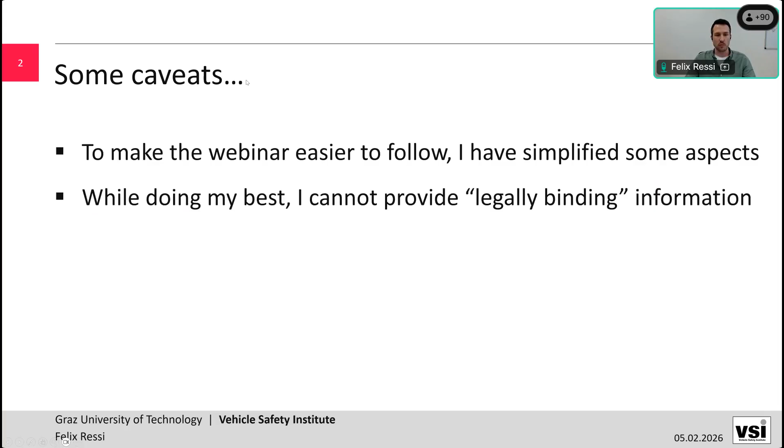I have made some simplifications just to make it easier to follow, so if there is something which is not exactly accurate in the sense of, well, there's one step you missed, Felix - some simplifications are, I think, a good idea to make it easier to follow. Also, while I'm doing my best, I cannot really provide legally binding information here, so keep that in mind. And most importantly, all the information in this webinar is valid as of today, at least. The next Euro NCAP protocol update will be implemented in 2029, and aspects in technical bulletins may even change before that. So keep that in mind and always make sure you rely on the latest relevant documents.

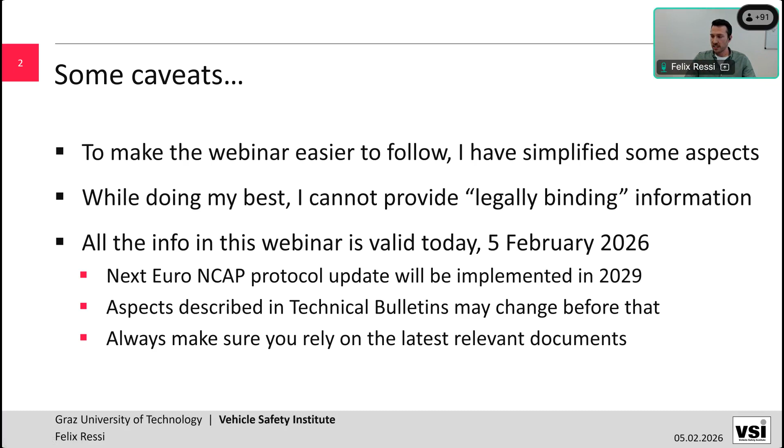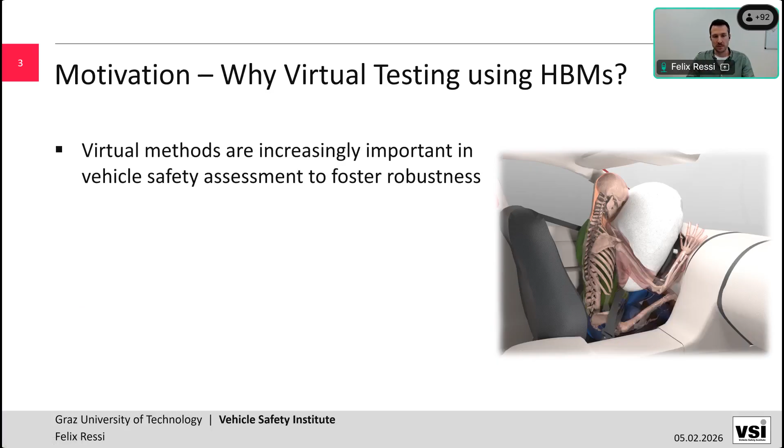With that being said, I'd like to start and say, well, why are we doing all of this? What's the motivation behind using HBMs in virtual testing? Well, first, virtual methods in general are increasingly important, not only in development, but also in vehicle safety assessment. And Euro NCAP has been a pioneer to some extent in this. One of the main goals here is to foster robustness. And human body models in particular enable us to overcome many limitations of current dummies or ATDs.

One of them is that they enable enhanced injury assessment, for instance rib fracture risk predictions, down to a tissue level. This can also be used to consider effects like aging. And very importantly, we can consider anthropometries where no ATDs, no hardware, exists. This is really a key benefit offered by human body models. Also, these models enable us to look into lower severity but higher exposure crashes, which recent research has shown to be really relevant in the overall accidentology.

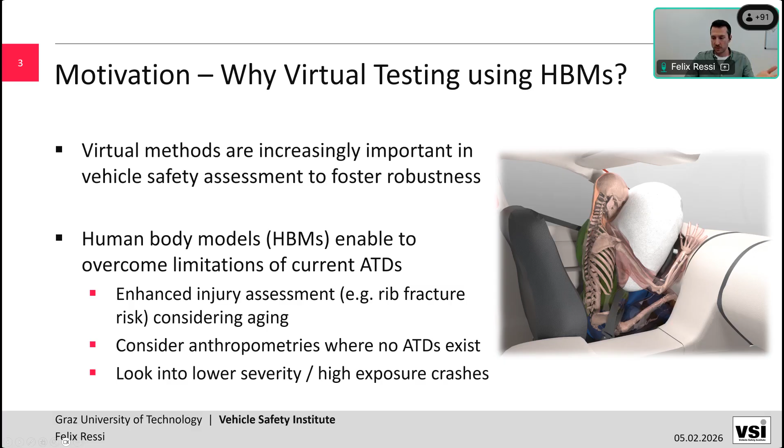So we say that's a really important step, including HBMs, but as always, there are major challenges involved with new developments. I have brought four major challenges for HBM implementation, and this is also providing some structure to this webinar.

The first thing is we need to make sure that the models are good enough—this is what we call the qualification of human body models for virtual testing. The issue here is that we have no direct, well-defined physical counterpart. Like when you think of a dummy, you have the physical measurement device.

That doesn't exist for human body models. While actual humans exist, every human is a bit different. That leads to the fact that if you do PMHS testing—post-mortem human subject testing—you have inherent biological variability there. So there's always going to be differences, and that's just the nature of the tool.

A second part is that we really need to make sure we have harmonized usage of these models in virtual testing. So the question is, how can we use these models in a comparable way? And further, harmonized interpretation of results is a key challenge—for instance, knowing which outputs to use and how to use them in particular.

Finally, we need to make sure that the simulation results have integrity. We need to ensure that they were generated with qualified models, that the results were not tampered with, and that we can trust these results.

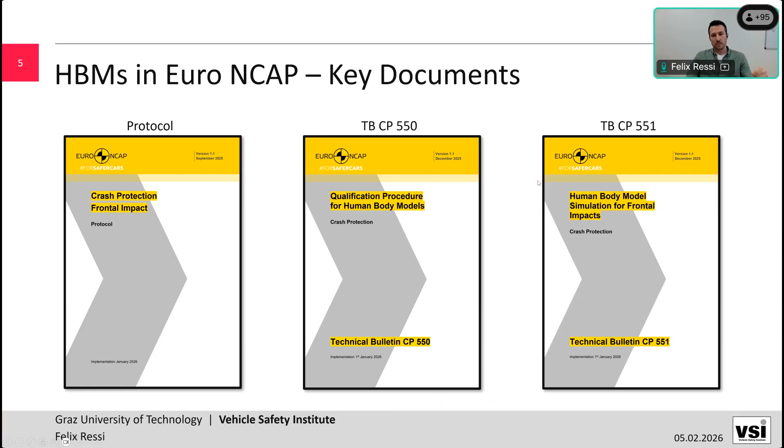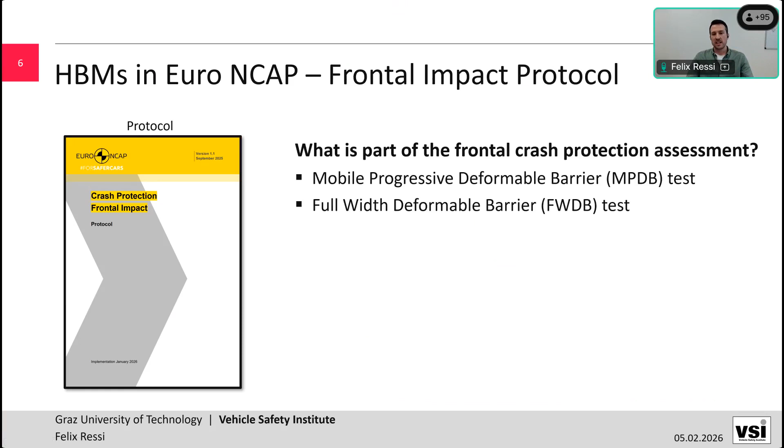Briefly, what do these deal with? The protocol essentially answers the question: what is part of the frontal crash protection assessment? It details the MPDB test, how to do full width deformable barrier testing, and then SLED and virtual testing.

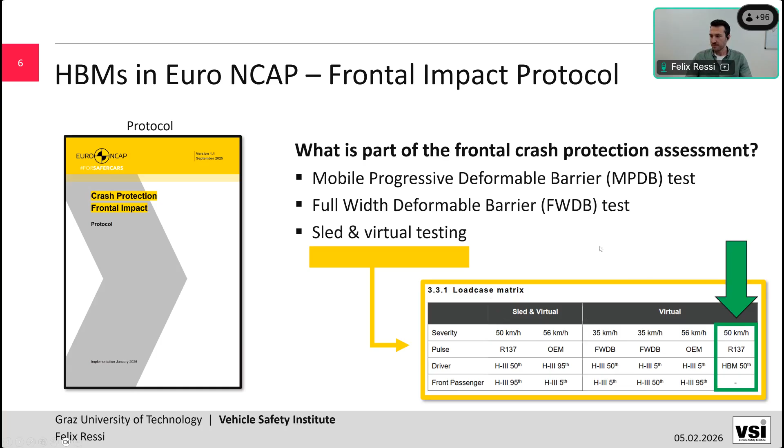So onwards to the Technical Bulletin CP550. This answers the question: when can you use an HBM for virtual testing? What does it need to do? It describes the qualification procedure and all the qualification requirements—from geometry to quality, detailing the outputs—and also the scores you need to achieve if you run the validation load cases.

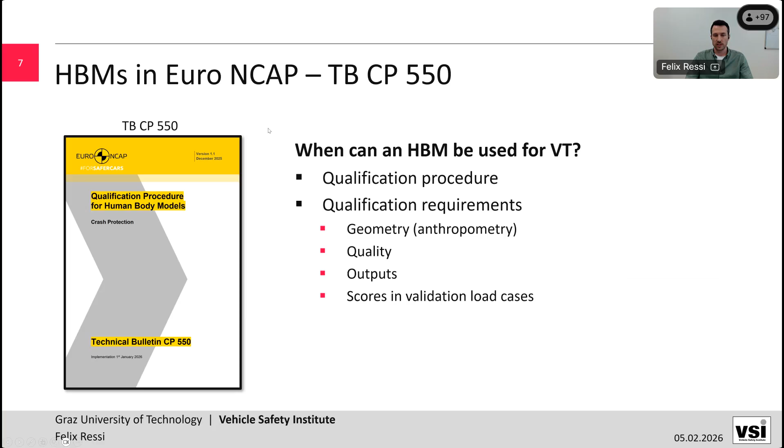I will touch on that more over the course of this webinar. The third document essentially answers: what do the HBM simulations need to look like, and what data do we need to provide to Euro NCAP? How to set up the load case in terms of seat position, HBM position, etc., and what quality criteria we need to fulfill to make these eligible for Euro NCAP.

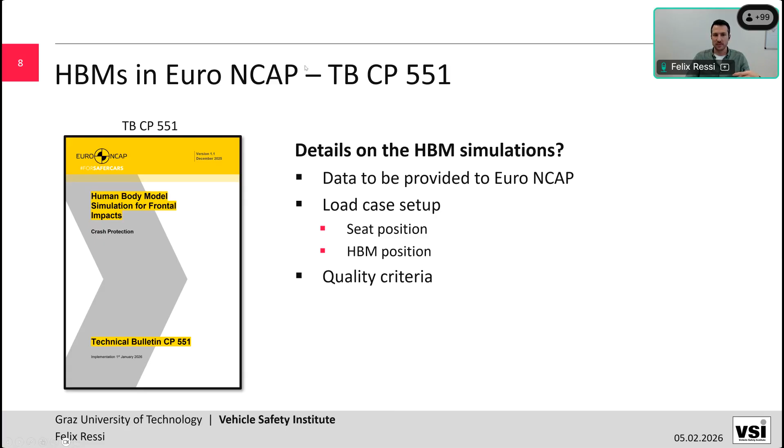So these are the documents essentially. Now I want to jump to the process to highlight how this ties in with existing virtual testing. Of course, virtual testing as such is not new for Euro NCAP—this has been around for dummies, specifically for the WorldSID dummy. This, for instance, is another technical bulletin, CP520, dealing with the WorldSID qualification.

Another document is available for the Hybrid III simulations. So this is also something which is already in place now. Just to recap how this works: you have a qualified dummy model, which is checked, of course, by Euro NCAP.

You do your CAE simulations, a set of virtual testing simulations, some of them validation simulations. For the virtual testing, you have checks on data quality, consistency, completeness, and several quality criteria. If you pass this, you can then move on to do your laboratory testing, where your validation simulations are checked against the validation SLED results from the physical tests.

That's your validation check in terms of ISO score, as well as assessment criteria. All of this is then combined in the assessment and scoring part, and you get points for virtual testing as well as your SLED results. So if we add human body models on top of that, the key part is that we also need a qualification part for the human body models—and as I just mentioned, this is CP550 in essence.

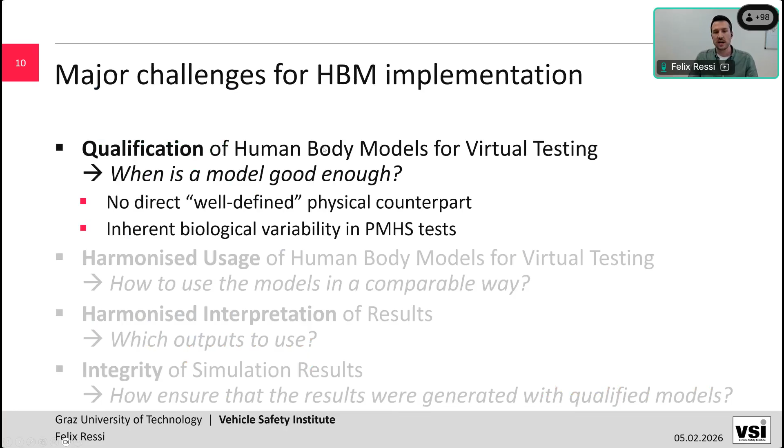So let's try to tackle the major challenges. I started with the qualification part. How is this now set up for Euro NCAP? Well, some people will maybe remember some of these slides from an IRCOBI presentation, and this is because the IRCOBI paper we made deals exactly with this procedure. But bear with me, there's some new slides as always.

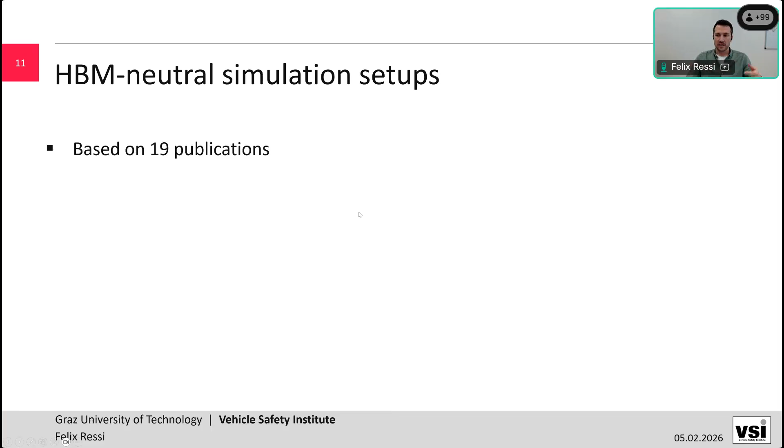So these HBM neutral simulation setups are based on 19 publications, and as we have heard in the introduction, they are HBM agnostic. The user just needs to bring their human body model, and then there's a step-by-step guide to set up the simulations. This was maybe what I had in mind when I originally started this work - you just put your model in, you get a HBM neutral simulation setup combined with that, and then you have a ready-to-run LS-DYNA deck. It's almost like that, not quite, but we're close.

And some important facts about these simulations: the HBM positioning, for instance, is mostly done within the simulation. Only the initial orientation is modified by parameters the user has to set initially, but the rest of the positioning is part of the simulation. The reason behind that is that the goal was to have a high degree of reproducibility, as well as allow for future integration of hashing, so traceability, which I will touch on later. So we want to make sure the HBM remains unchanged in each step, and no user interference, so to say, happens which is not controlled.

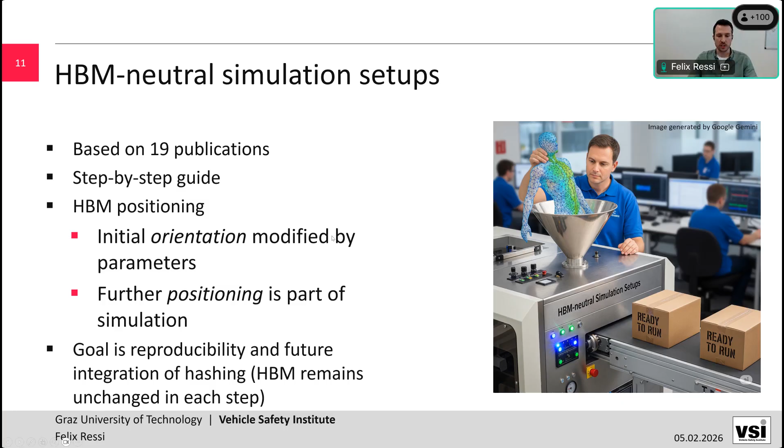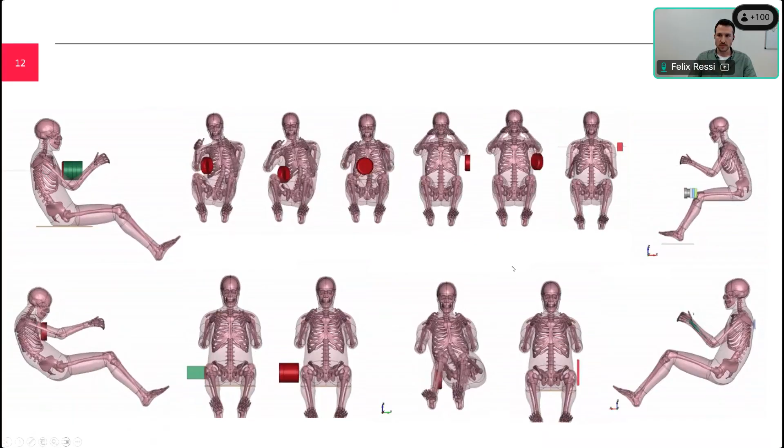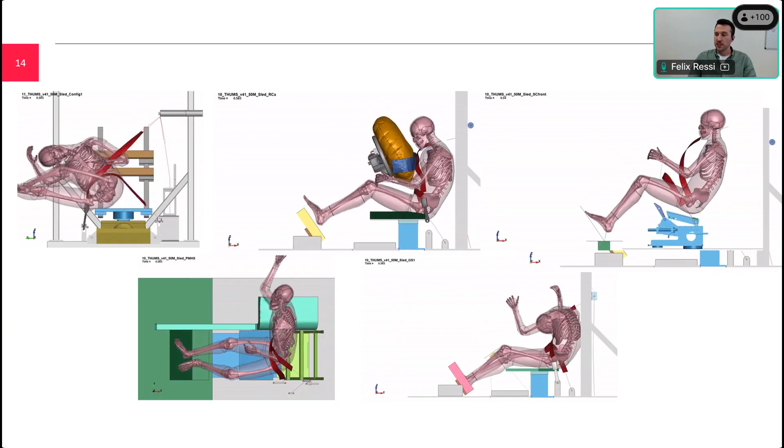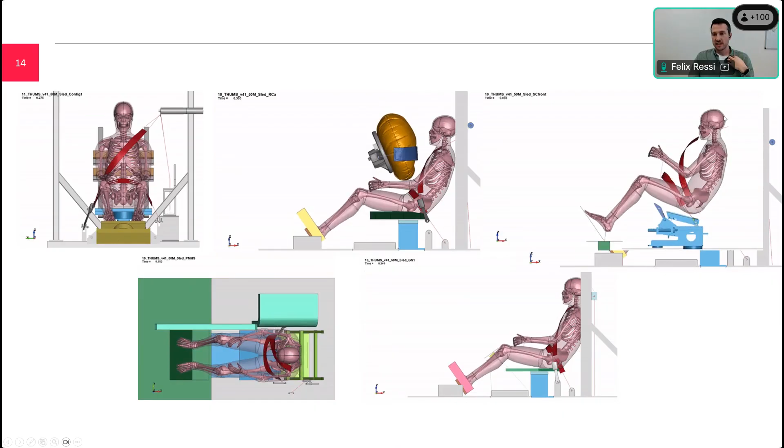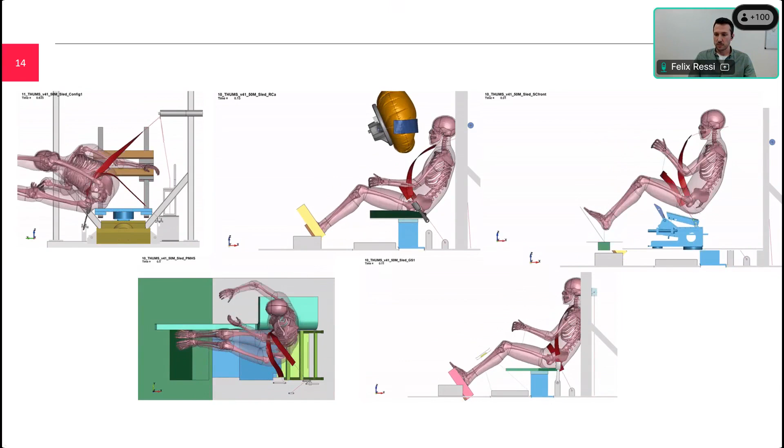But what do we do with these simulations? So we extract relevant information on kinematics, for instance, and then have derived corridors from the PMHS data and compare these with our HBM response. And for this, we have developed a specific scoring methodology. Before I touch on how the scoring works, I need to do some explaining of some basics, how this works.

So the basis for our methodology is a library or a method called ARCGen. And actually, this was developed by Devon Hartlen and Duane Cronin. The pictures I show here are from their publication, and actually Devon gave a great OVTO webinar on this topic. So if you are interested, we will also share the link to that here. But to explain the principle here, this will be a very short explanation.

If you imagine you have curves in the XY space, you can, for each curve, calculate their arc length, just following the curve along. And if you use this and then normalize the curves over their arc length and plot them as X over normalized arc length and Y over normalized arc length, this is what's shown here. This gives you a great option - you do feature alignment, so you can do some warping and make sure you align relevant features. And then with the aligned signals, you can do statistics and compute means for each point over warped arc length, and standard deviations for each point. And if you then recombine the X over warped arc length and Y over warped arc length back together, you get this XY plot where you can actually have ellipses for each point showing 2D confidence intervals.

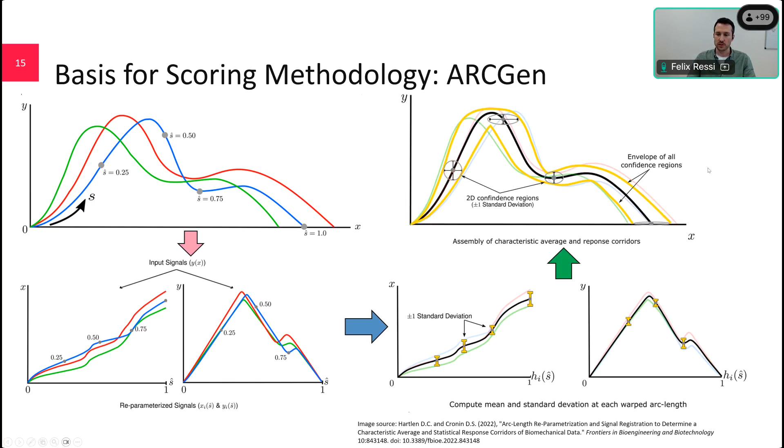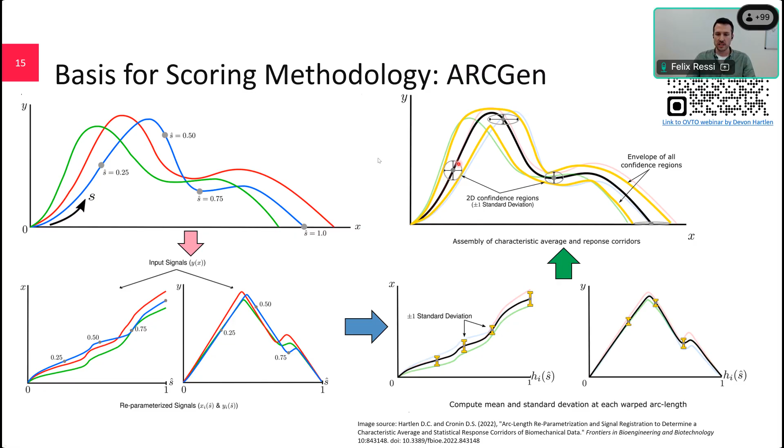As I said, there is a great webinar by Devon on the details of how this works, but I want to touch more on how we use it. And if you look at these ellipses, this is what we use for the scoring here.

So this is an example. The plot on the left shows a time displacement diagram, and in this case, it's for a sled test, the gold standard 2 test, where we look at head X displacement.

And you will see here I plotted a green ellipse and a red ellipse. Well, what are they based on? The black dashed lines are the PMHS responses. The lime green line here in the middle is the characteristic average, calculated using ARCGen.

And the darker green lines are the envelope of the 1 standard deviation ellipse, and the red lines show the envelope of the 2 standard deviation ellipses.

And our scoring works in the following way. So if your blue HBM response—sorry, I forgot to mention this—here now I have one simulation response in there, which is from an exemplary HBM simulation.

If this response at each point is within the green ellipse for the respective corresponding point of the characteristic average, you get a score of 1. If you are outside of the 2 standard deviations ellipse, you get a score of 0.

And for any point in between the 2 ellipses, we do a linear interpolation to get your score, so that's between 1 and 0.

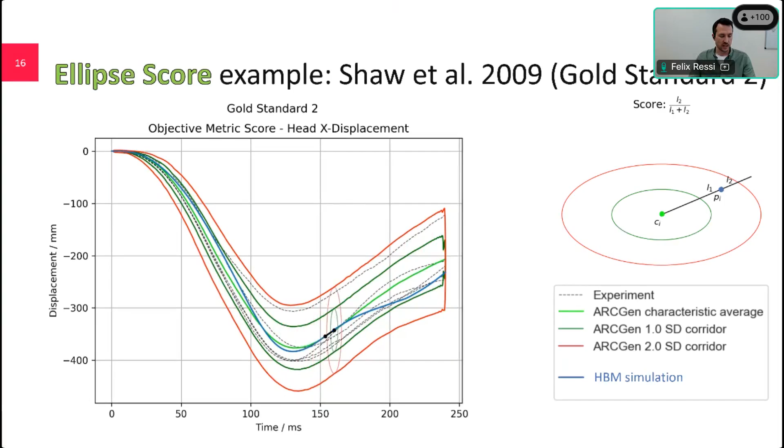So we added a second score, which we call the dynamic arc length warping score, or DALW. And this uses the same principle as ISO scoring, where you have a dynamic time warping.

In simple terms, you have a window where you don't have the fixed mapping between each point of the ARCGen characteristic average and the simulation curve, but you have some margin where the algorithm tries to connect the best dots to get the lowest score.

And if I play this animation, you will see that this aims to be within the green ellipse as much as possible. Of course, if the deviation is beyond, in our case, 10% based on arc length, then it will not be able to keep it in the green ellipse.

But in this example, the corresponding DALW score is 0.97, so a lot higher and almost a perfect score, which would be 1, of course. So these are the two scores we developed for this.

Why did we stick with 2? We found in our testing that this DALW score can be very lenient, so to say, and you still have quite different looking signals that still score relatively high.

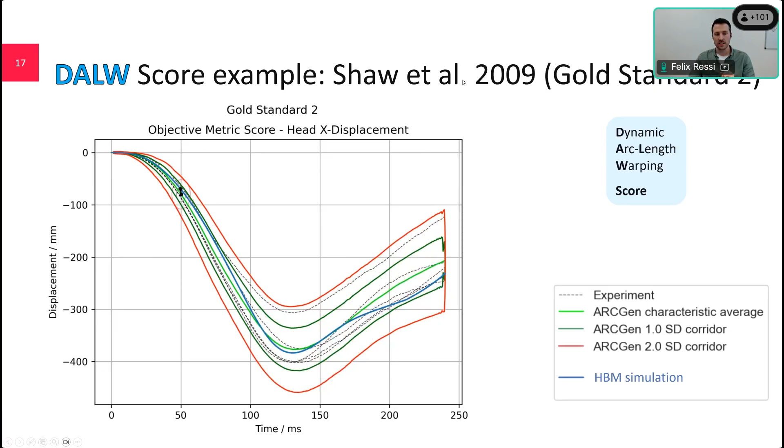And by putting 2 scores into the requirements and the technical bulletins, we hope to remedy this effect for the monitoring phase. But this is not set in stone, in the sense that we are really keen to improve this methodology. But this is what's now implemented in the current technical bulletin.

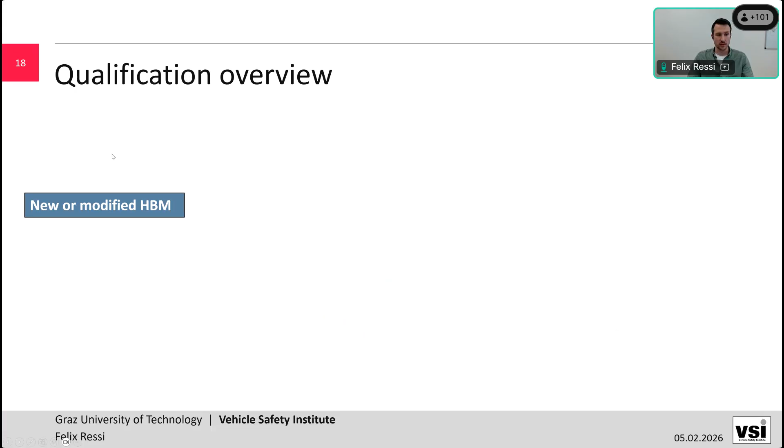So with this, I can give you an overview of how the qualification works. If you now have a new or a modified HBM and you would like to get a certificate to say that this is now a qualified HBM you want to use in virtual testing, you need to do a full qualification if this has not been qualified previously.

That incorporates the geometry, the quality criteria outputs the model has to have, and you need to run all the validation load cases. Based on the results, there is a check, and if you fulfill the requirements, this HBM can be used in virtual testing. If the HBM does not fulfill the requirements, it cannot be used.

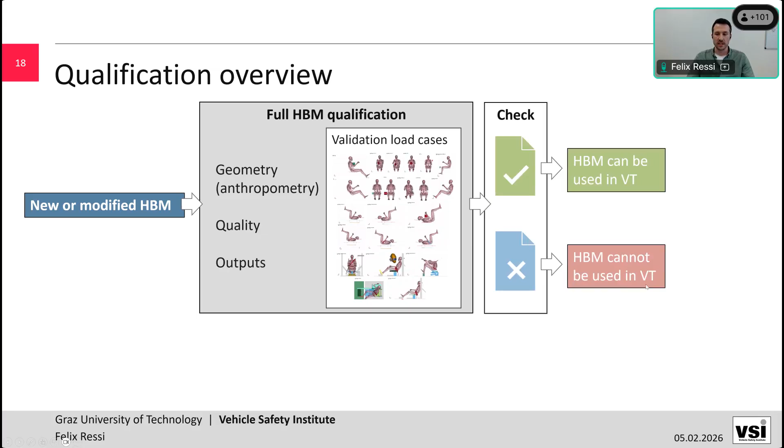But more often than not, people will use existing human body models that have already been qualified. Here, the user just needs to run two simulations. The reason is we want to see that the human body model, when used by the specific vehicle manufacturer or supplier, behaves very similar to what was submitted in the full qualification. The requirement is that you are within 0.1 plus minus points of the score, making sure you get very similar scores as when the model was originally submitted.

If you pass this check, the simulation results are eligible for full points. If it doesn't pass, that's still not the end of the world, because you could still go for a full qualification. If you pass all the thresholds and requirements, you can still use it for virtual testing. All of this is part of CP550, the whole process.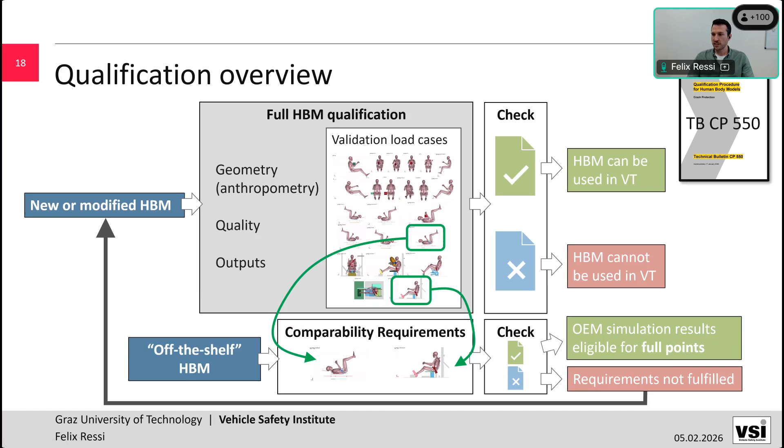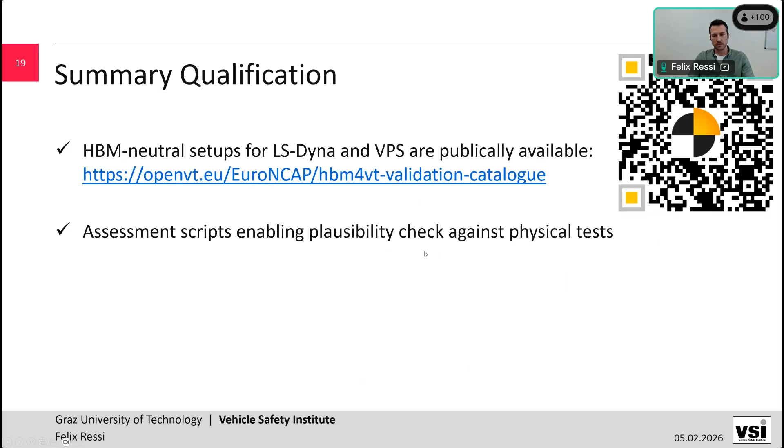So to briefly summarize the part on qualification, we have these neutral setups available for LS-DYNA and VPS publicly at OpenVT. They directly have an assessment script attached, which serves as a plausibility check first, and also serves to compare against physical tests with the scoring. So you actually have the biofidelity scoring in the notebooks.

And what was also done during this qualification is this Euro NCAP technical bulletin. So this procedure was applied for the Euro NCAP CP550.

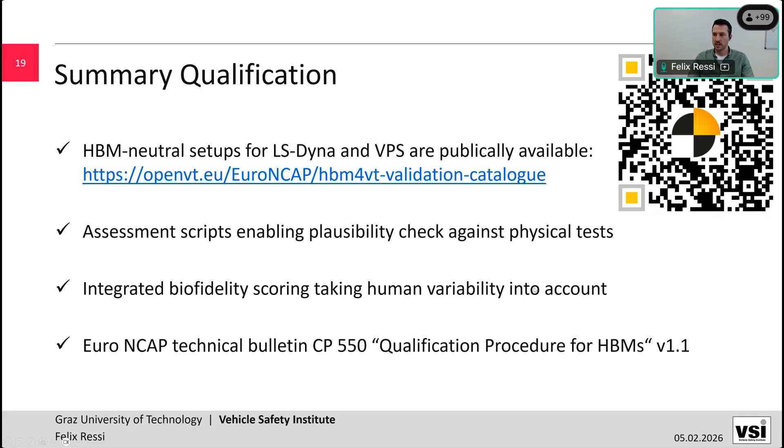Now, within the last months, Euro NCAP has issued a number of certificates for human body models, and because this came up quite a bit recently, I took the liberty of putting them on screen here. Please remember this is just as of today - that can change quickly. If people add new models, they will be qualified, and then they get a certificate. So this is just the list as of today.

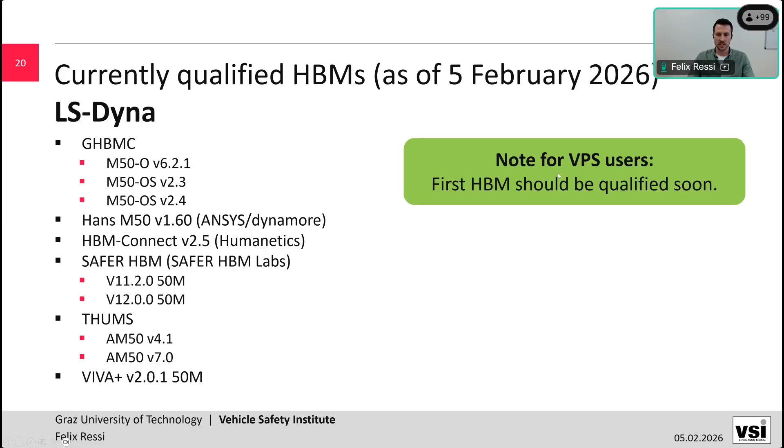And as you can see, there's a number of commercial models like GHBMC, Hans, HBM Connect, Safer, and also models that are freely available like THUMS or even open source and hosted on OpenVT like Viva Plus. Note that this is the list for LS-DYNA. The VPS users should very soon also get the first HBM available - the qualification submission is almost finished.

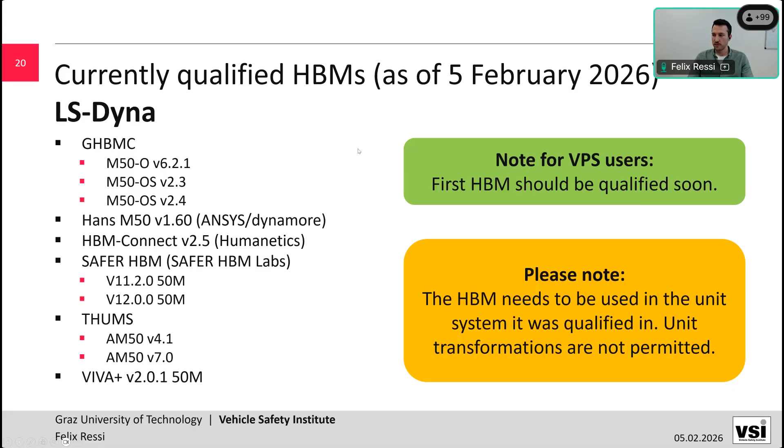Another important note: the HBM needs to be used in the unit system it was qualified in. So the user cannot transform units as they need, but they need to get the HBM in the unit system that the rest of their model has. This is important to keep in mind. Several of these models are already qualified in two unit systems because most OEMs use either one of two unit systems. So that's sort of the challenge of qualification dealt with.

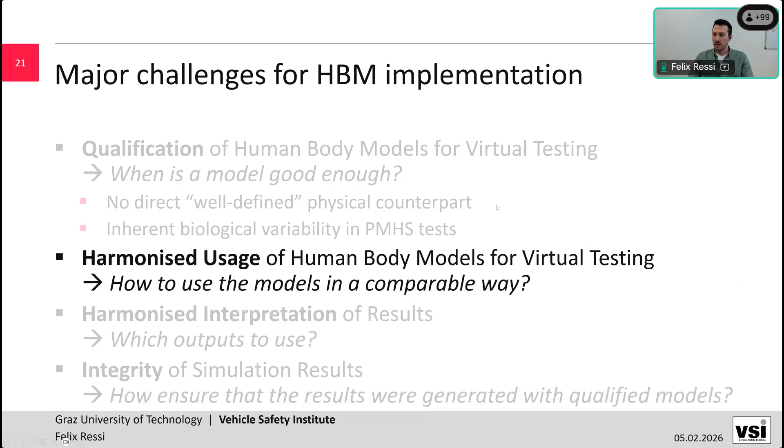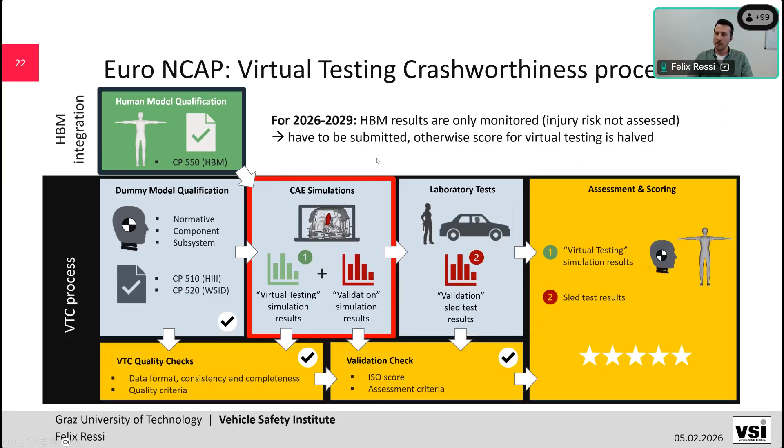Now we talk about harmonized usage - what should we do with the model now so that it's used in a comparable way. Well, in Euro NCAP, we again look back at the process - that's the part highlighted in red. And again, there are several documents putting their information into that.

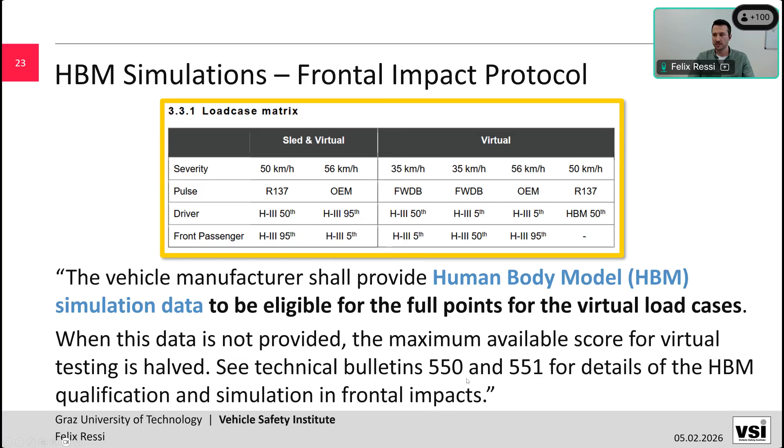Essentially, the load case is the one on the very right in terms of pulse, and the driver position is average male HBM. We have already talked about that - you need to provide this or you will have your maximum scores for virtual testing halved. But what do I really need to set up? That's in CP551. You see here that you need to run this load case in four different seat positions.

On the right-hand side, you see this simplified seat adjustment range. The seat positions defined include one position close to where the Hybrid III dummy would sit. So the seat is essentially in the position for the Hybrid III, and the HBM target position is indicated here.

The second position is termed an ergonomic position, based on a regression model from a volunteer study by Reed et al. from 2002, which is a widely used regression model for driver posture and seat position.

There are two additional positions. Positions 3 and 4 use the same approach as the ergonomic position, but the seat is moved forward and then backward by the root mean squared error provided for the regression model, just to cover the range that's potentially realistic with this procedure.

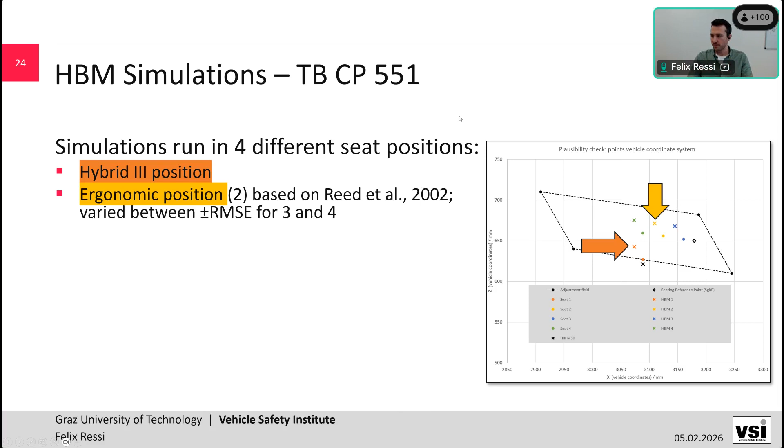There is a spreadsheet where you can calculate your positions. That's also shared on OpenVT, along with some explanations in the spreadsheet.

Note also that repositioning is only allowed for the extremities, to keep the spirit of introducing as little difference and uncertainty from user changes as possible. We do not allow changing the spinal posture, for instance.

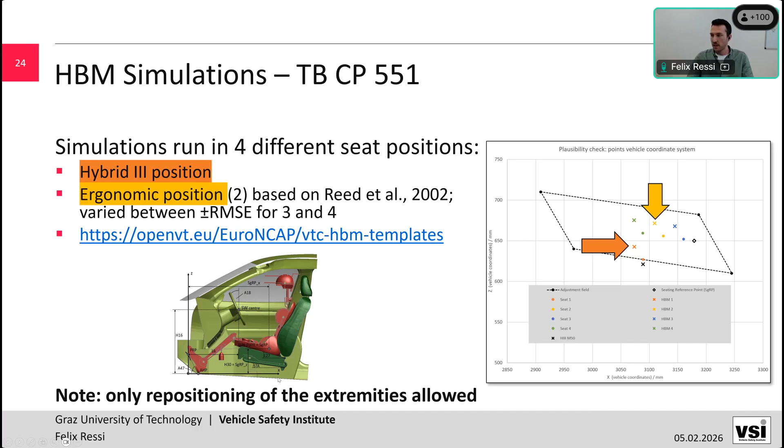In CP551, it also details what's requested in terms of files and data. There's some documentation required and some simulation metadata, and then simulation outputs that differ between LS-DYNA and VPS.

For LS-DYNA, you can either submit the raw binary files, the binout files, or generate the CSV file from your binouts using the scripts available on OpenVT in this repository.

For VPS users, you can submit your ERFH5 files, or share selected ERFH5 files and/or additional CSV files, for which there is a script available from Keysight Technologies Support.

We are in contact with them, and they are working hard to make the process identical for LS-DYNA and VPS, in the sense that there will also be a script running the same Python library, making this more seamless and streamlined for users regardless of which code they use.

For Radioss users, there is also a description in CP551, and that's just the standard output files from there. So far, we haven't had any requests to change that.

And last but not least, animated results are requested just like for the ATD simulations.

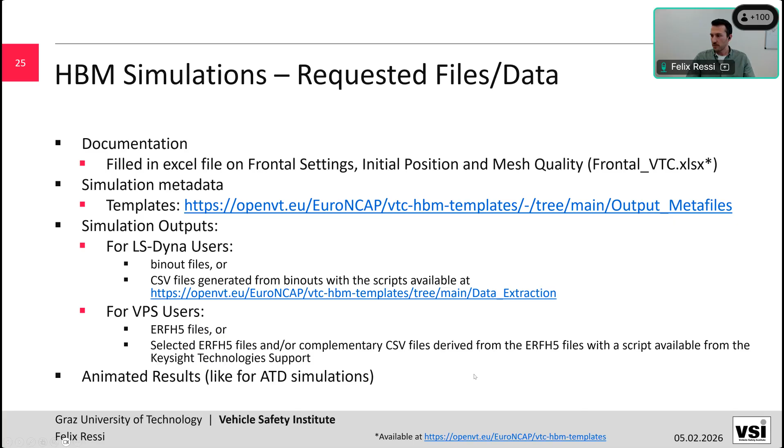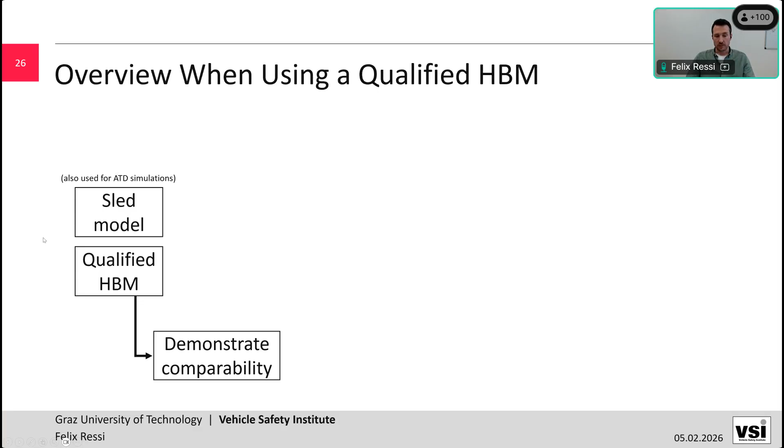So to recap, what do you do when you use a qualified HBM? You have the SLED model you also use for your ATD simulations, and you have a qualified HBM. For that, you just need to demonstrate comparability, as detailed in CP550.

Then you can combine both your SLED model and the HBM and set up the HBM simulations as detailed in the protocol and CP551. Run these simulations, and then submit results to Euro NCAP.

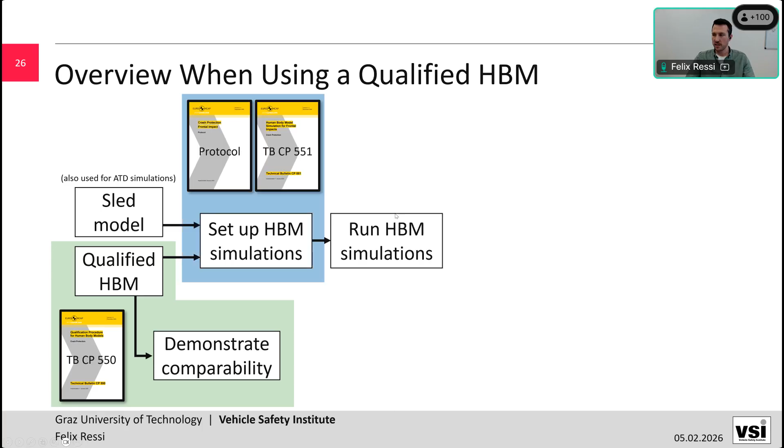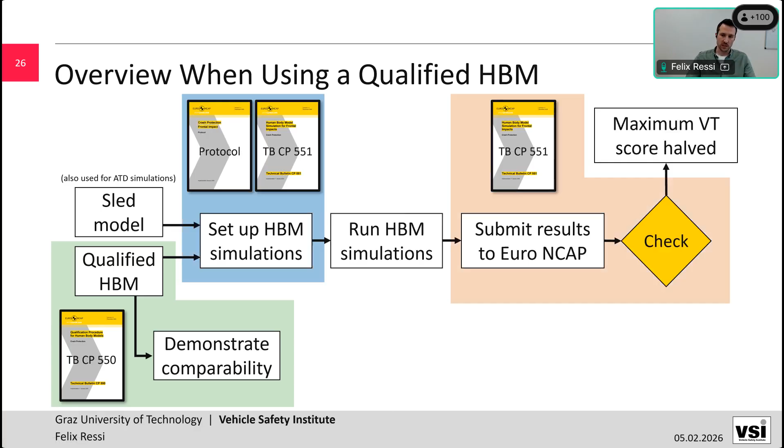As we just saw, what kind of results you need to submit is explained in CP551. Based on several checks on these results, either it's determined that this is not a valid HBM result you submitted, or you are eligible for the full virtual testing score since you provided qualified HBM results and eligible results here.

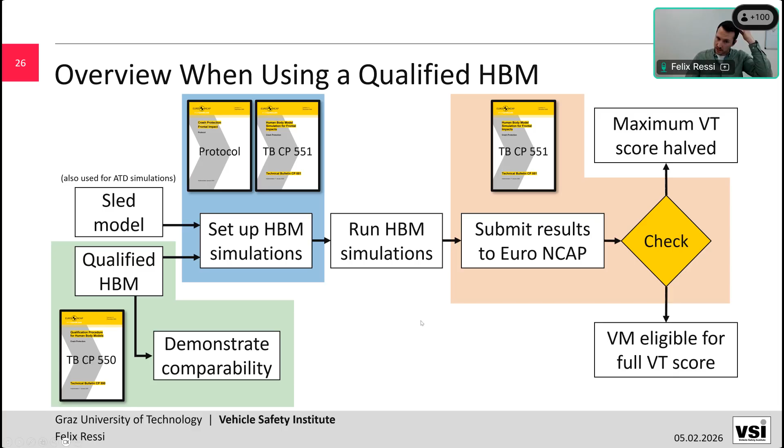First, I'd like to thank everyone who participated in the HBM for VT meetings. There is this framework of experts from industry, academia, regulatory bodies, developers, etc., who provided really valuable feedback and contributions before and during the development of these public validation setups.

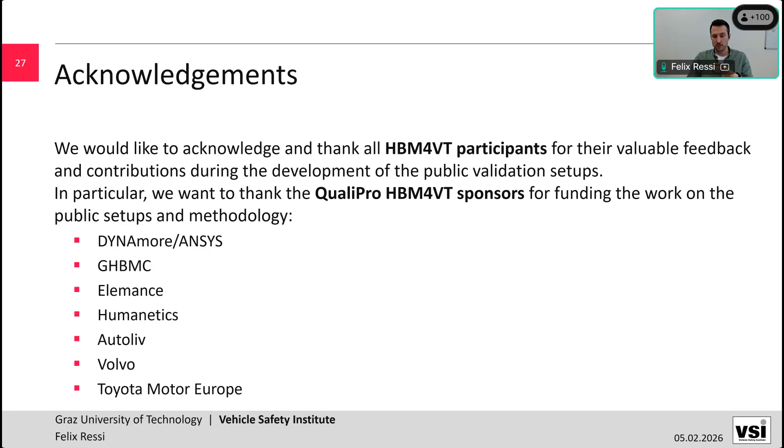And that brings me to my conclusions. Again, I'll try to stick to the challenges I laid out before. In terms of qualification, there is a first procedure available, and you can be sure we will have discussions on how to refine it until 2029.

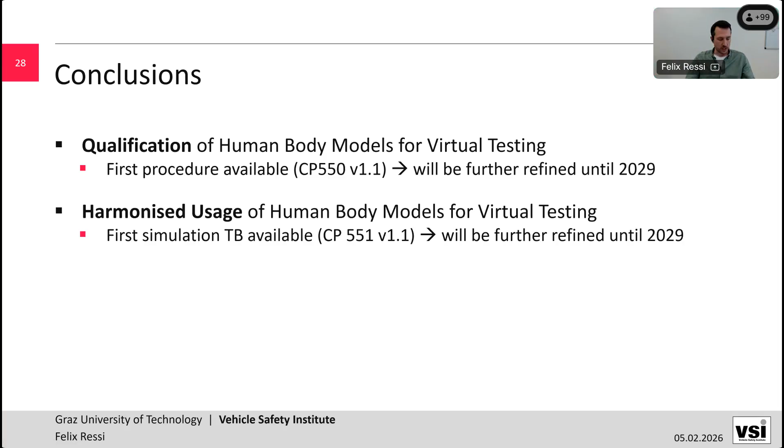As well as I have covered the harmonized usage, we also have a first technical bulletin on the simulations available. This will definitely be refined until the next protocol update in 2029. While I have not touched on two other points specifically, I'd like to mention them here again.

With respect to harmonized interpretation of results, we deliberately decided to look at this now during the monitoring phase, to see the range of results we get, how useful this is, and what results we can really use reliably. This is something we are starting to tackle now, and we expect to get a reasonable amount of data by early autumn or late summer, and can then dive into this evaluation based on monitoring results. But we will do work before that.

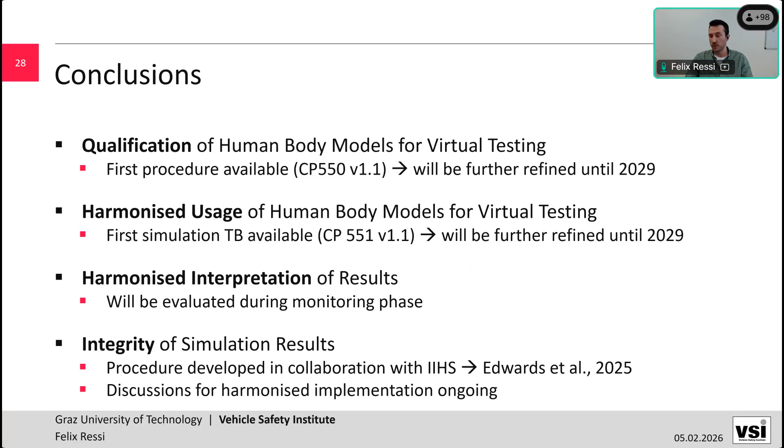With respect to integrity of simulation results, there was a publication on a procedure for traceability in collaboration with IIHS in the US - that's Marcy Edwards et al. from the 2025 Kobe conference. These discussions for implementing this procedure with IIHS are ongoing. I'm currently having constant talks with IIHS, trying to make sure we can have a harmonized procedure for how to integrate traceability by 2029 for Euro NCAP.

That gives me the segue into an outlook. The traceability integration I just mentioned is something that will be jointly tackled by Euro NCAP and IIHS, to make sure this is harmonized also when IIHS introduces simulations into their assessment. We are now investigating rib fracture risk assessment as the first candidate for injury assessment for harmonized interpretation of human body model results.

There is a plan to include additional HBM anthropometries by 2029, specifically the small female and the average female anthropometry. As I mentioned, we are working on improving the scoring methodology, and for 2029, other parts of the assessment are also looking into using human body models.

For instance, there are plans for a virtual vulnerable road user VRU implementation. For that, we also need updates to the qualification procedure to make sure these load cases are covered. So this is just a selection of proposed protocol updates.

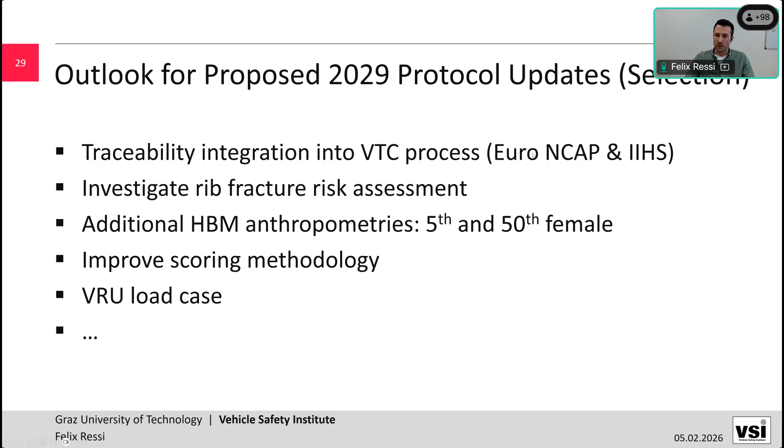With that, here are some of the references. As I said before, these will be in the description, in case you have further questions after we've wrapped up this webinar. The 2026 protocols are available online, of course.

If you have questions about the data upload to the Euro NCAP VTC server, I'm afraid I'm not the ideal person to answer, as this is now handled by a company doing this, and IVEX is in the final weeks of testing, as I hear. They are inviting the first OEM test candidate now, and I think in the next several weeks they will open it up to all manufacturers and suppliers who previously also had access to this server. So this is finally taking shape.

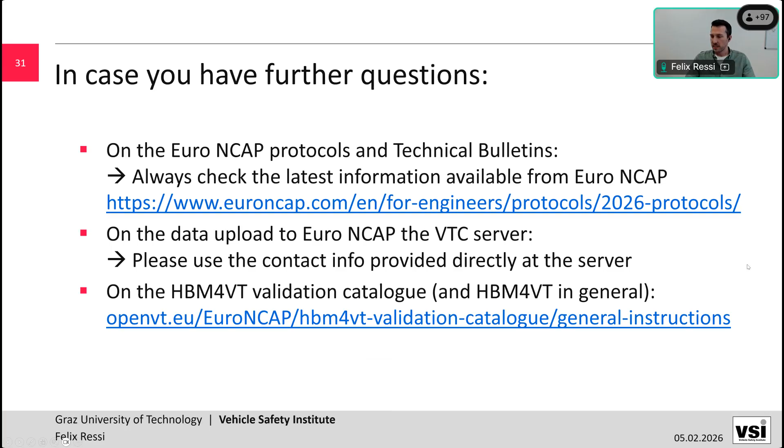And if you have any questions on the HBM4VT validation catalog or HBM4VT in general, we have compiled some information on the catalog on the general instructions site on OpenVT, in the Euro NCAP group on the HBM4VT validation catalog. With that being said, I'm really grateful that so many of you joined this webinar, and I look forward to a good Q&A session. Thank you.

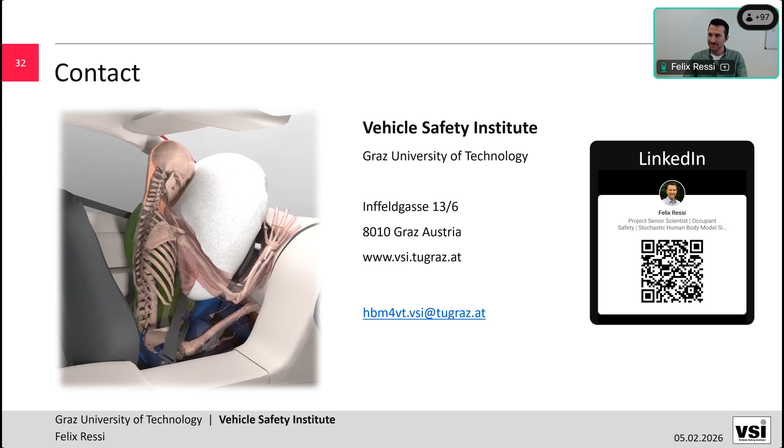Let's go to some HBM related questions now. And here's a question on...

Initialization of stresses during the start of the simulation. The question goes like this: I've seen considerable differences in the occupant kinematics depending on a proper initialization of the model. In the qualification load cases for the HBMs, the pre-positioning is always part of the simulation, so an initialization for subsequent simulation is not necessary. However, in reality, it will be likely that a staged simulation approach is used for vehicle simulations, where there's no proper initialization, and then the results will be off, naturally. Is an approach to initialize the HBMs going to be part of the regulation in the future? Will it be mandated to do all the pre-simulations and positioning in a single simulation with the actual load case? Or if not, why neither? Also, some current preprocessors like Primer are not working because initial stresses and strains are not exported from materials that don't support that.

Yeah, so the quick answer is probably this is the first implementation, so bear with us to some extent. We had a lot of feedback on that from the developers in terms of this works, this creates issues, whatever. This is exactly a problem with the dynamic relaxation phase, for instance, that some people at an OEM found, and this was not something identified with our simulations, but there is nothing stopping people from using a dynamic relaxation phase in their SLED environments in theory. I guess the question is if that still works with all the rest of the chain, so to say.